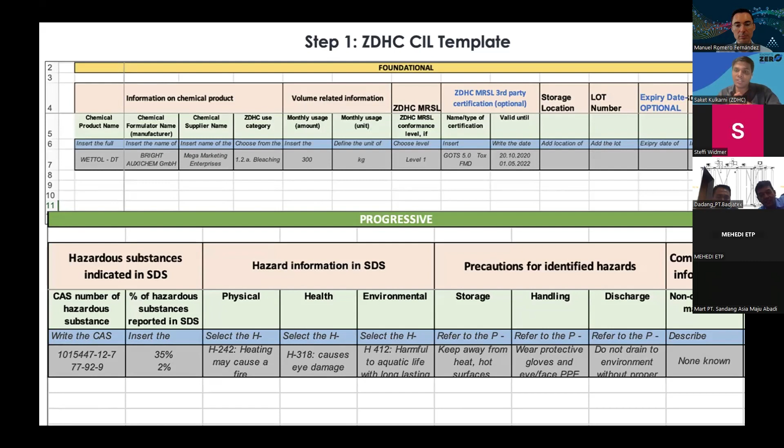This is the simple CIL template which is available on our website as well. You can download it and fill in all the details. Whatever incoming chemicals you are using in your facility, you should mention all the details of such chemicals and check whether those products are registered into the gateway or not.

The second thing is about the gateway platform. I hope all of you are registered into the gateway platform, but if not, you can register. In this, there are two modules: one is the chemical module, another is the wastewater module. The chemical module is basically the world's largest database of safer chemicals.

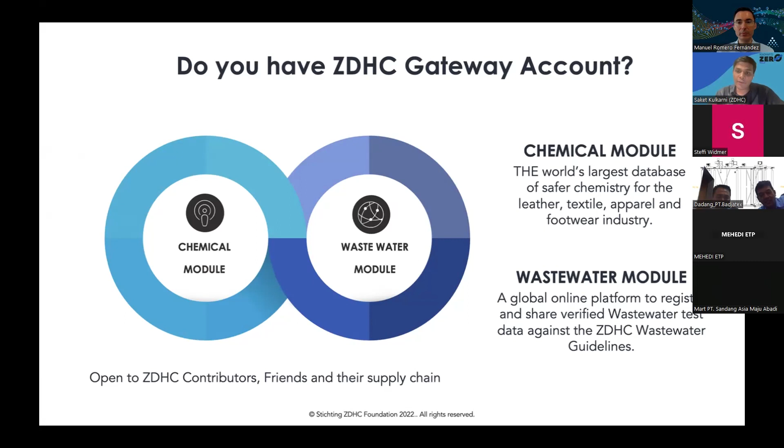As of now, there are more than 110,000 chemical products which are ZDHC MRSL compliant registered into the gateway. The wastewater module is an online platform to register and share your verified wastewater test data against ZDHC wastewater guidelines.

In my earlier slide, I mentioned a terminology called ChemCheck. ChemCheck means a product passport. For whatever chemical products you are purchasing, you can ask for the ChemCheck report, which ensures that this product is ZDHC MRSL compliant and does not contain any harmful chemical, and that it is published onto the gateway platform.

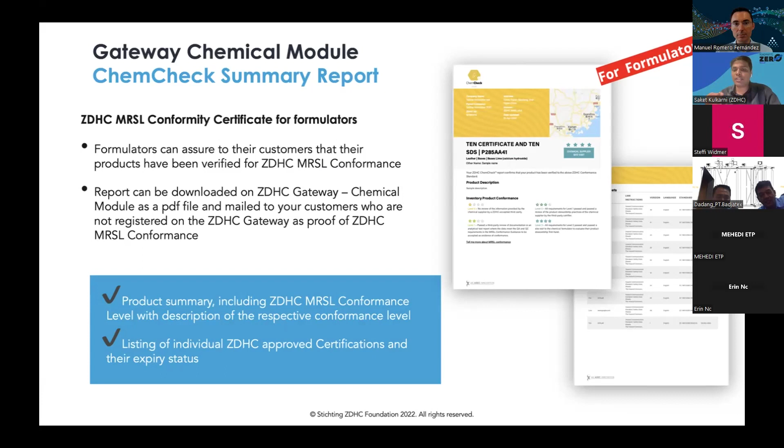So whichever products are published onto the gateway platform, for all those products the chemical manufacturer can generate a ChemCheck report and share it with you.

The most important part is input chemical management. In input chemical management, we have a guideline called ZDHC MRSL. MRSL stands for Manufacturing Restricted Substances List, which is a list of substances banned from intentional use in commercial chemical formulations. That means whichever chemical you are purchasing and using in your factory, in all those commercial chemical formulations, the MRSL listed substances should not be present.

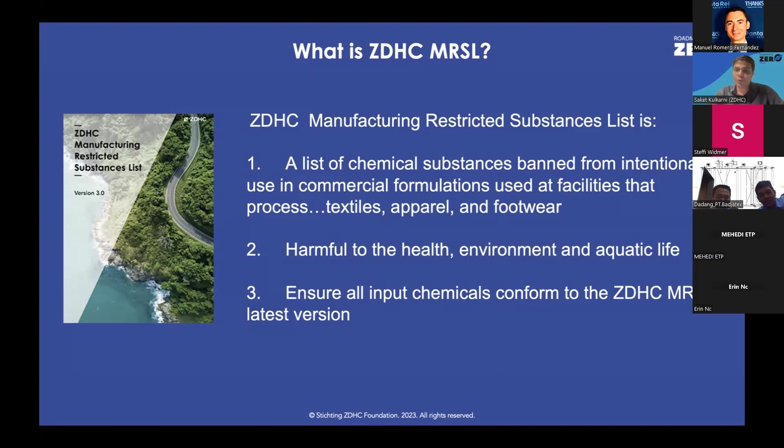Why are these substances regulated? Because they are harmful for health, environment, and aquatic life. As a supplier, as a textile or leather manufacturer, it is your responsibility to purchase at least ZDHC MRSL conformant chemicals. These chemicals are divided into three levels: level 1, level 2, and level 3. At least as a supplier, you should purchase level 1 compliant chemical products.

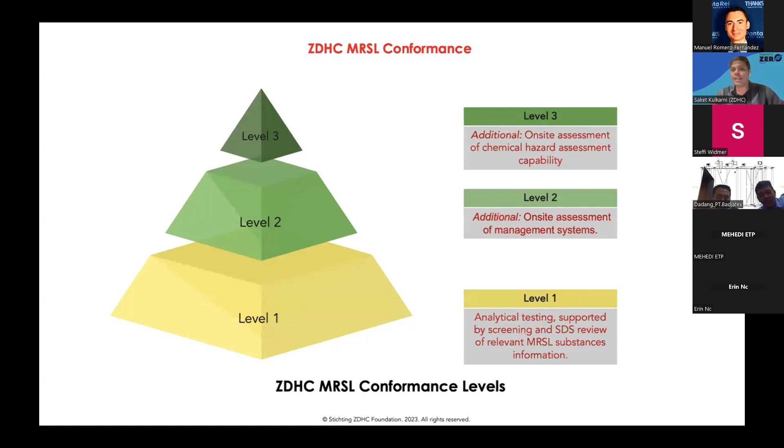When you prepare your chemical inventory using the gateway platform, you can also find out whether that product is published into the gateway or not. You can simply search the product name.

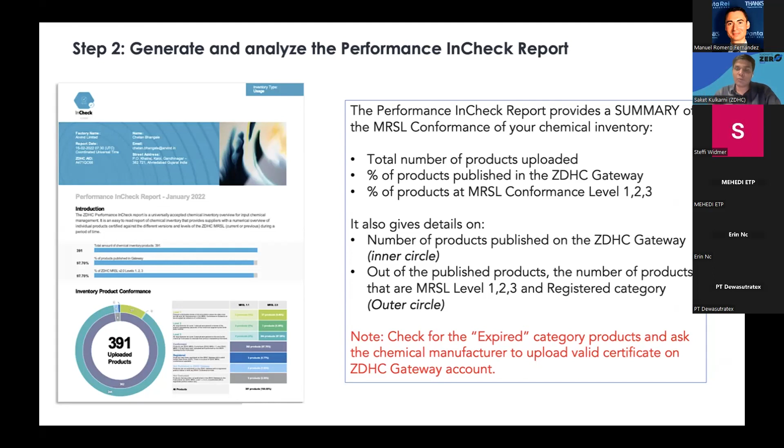For those non-conformant products, you can connect with the chemical manufacturers and request them to publish the products into the gateway platform. This is how you can improve your MRSL conformance status as well.

The third stage is about the verified in-check level 1. Now, with the performance in-check report, the inventory is uploaded by yourself, so there is an issue of credibility and transparency on the inventory. To create credibility and transparency, we have come up with new guidelines called verified in-check level 1. It's basically a spot check guideline where the supplier undergoes a verification, and if they achieve more than 80% score, they get a check mark.

Then the fourth and most important step is to establish a connection request with your ZDHC signatory brand. When you establish a connection request with your brand, that means you are giving them access to the data. So whatever you are doing on the gateway platform, whatever you are implementing for the ZDHC Roadmap to Zero program, you are sharing this data with your connected brand.

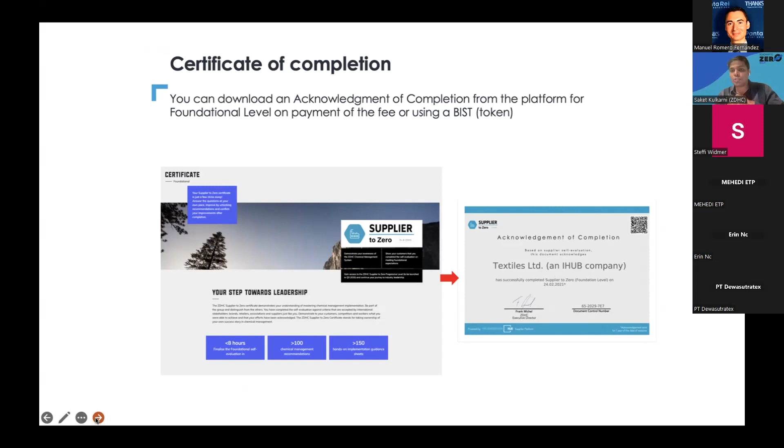This is how it looks like. The validity of the certificate is for a period of 1 year, and this certificate will also reflect into the ZDHC gateway account. The third part is about output chemical management, where you need to perform testing with respect to ZDHC wastewater guidelines and generate the ClearStream report.

Please understand that the wastewater testing is not a pass or fail report, but it is a tool to support you for improving your input chemical management as well as the process chemical management part as well.

Then lastly, we have a platform called ZDHC Academy, through which the suppliers can register themselves and take the trainings as well. All the courses are registered here under the courses list. ZDHC accredited training providers can take all these courses, and for getting a certificate, you must achieve more than 80% scoring.

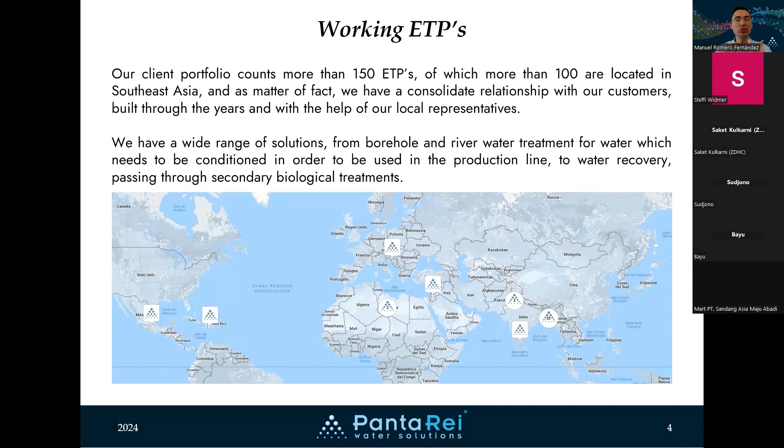Just a little bit about us, in case you don't know us. We are an Italian company with international presence, and we've been in this market for 17 years. We are trying to help our customers achieve their environmental compliance related to water and wastewater. We have 17 years of experience as PantaRei, but some of us, such as PantaRei's founder, Mr. Felice Raca, has more than 25 years of experience in this water and wastewater treatment field. We have more than 150 effluent treatment plants, and more than 100 are located in Southeast Asia. We have a consolidated relationship with our customers, and this wouldn't be possible without our local representatives, like Primatec in this case in Indonesia. We can offer anything from borehole or well water treatment to water recovery, and of course secondary biological treatments. We think one of the most important things about us is that we focused on the textile industry, because we know it's a very specific kind of effluent that you can have in the textile industry, and this is why we strive to give the most sustainable solutions for this market.

We're an ISO certified company, but most importantly, and we're proud to be an accredited training provider of ZDHC. As Saket said, this is not a certification. This is a program that has united partners and contributors with the common goal of guaranteed water discharge with increasingly stringent parameters as a part of the compromise with environmental sustainability.

We want to contribute as much as we can with this shared objective, because as we like to think about it, ZDHC is not a certification, is not a law requirement, it's a philosophy of having a holistic approach from cradle to grave, a closed loop. Because if you have good inputs, you will have good outputs. This is what we're trying to do here, to put all the stakeholders together for a greater good.

And then we'll come to the ZDHC wastewater guidelines. Many of you may already know this document. This is in order to have a single approach towards discharge limits in the textile industry. Because now we know that in different countries there may be different regulations, this document, with the technical team and also with the buyer stakeholders, is trying to create an even baseline for everyone, so it is clear for everyone, and so that this guideline is your go-to reference point when it comes to wastewater, so that everyone can have the same documents, the same approach.

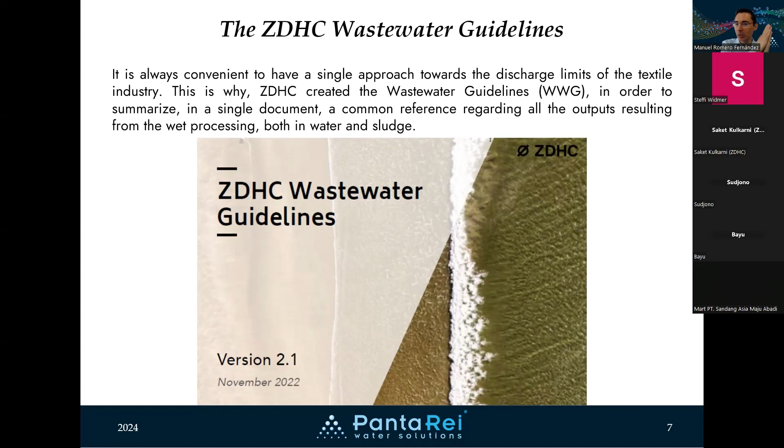And through these wastewater guidelines, we look at the output part. But as I said, the MRSL is a very important guideline as well, because basically you get what you put into the system.

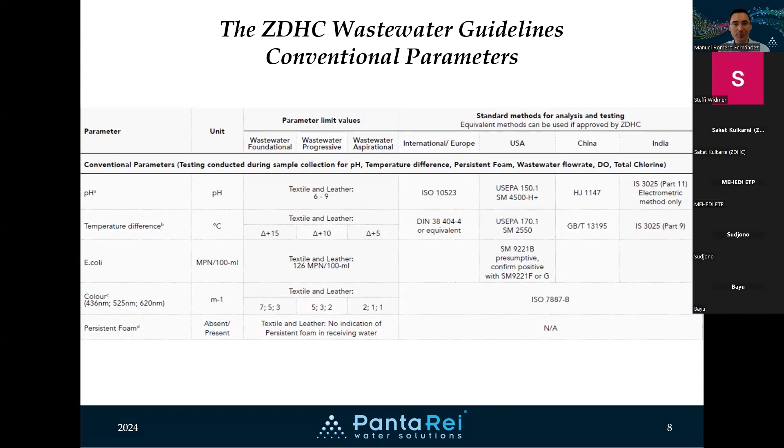That's very clear water. That's measured in meters -1. And then you have the foam. You have here some other parameters that are also part of the conventional side.

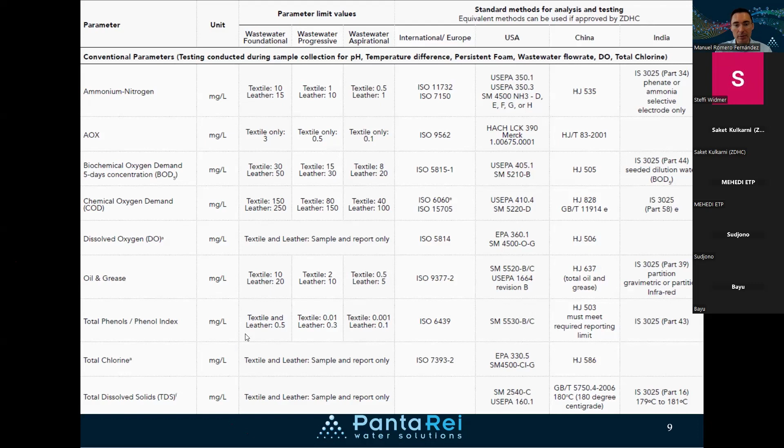How do you meet the wastewater guideline parameters? I think some of the most important things come from simple approaches. First, know your wastewater. It's important to carry out composite samples, and it's highly recommended that not only conventional parameters are tested, but also heavy metals, in order to know that you are compliant with the complete wastewater guidelines.

What we saw before covers conventional parameters, but of course you also have metals and so many other components. And you have the MRSL as input, because here we're talking about output, but as we said before, what you give is what you get, basically, also in wastewater treatment. So first of all, you need to know what kind of wastewater you have.

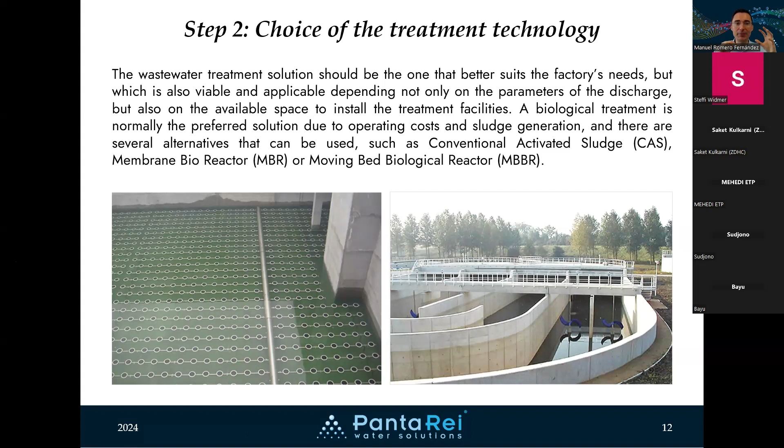Depending on that, you can choose the treatment technology that will better suit your needs. There's a very wide range of technologies you can apply, depending on the water quality you have and how much space you have to install that treatment. For example, conventional biological treatment is often a preferred solution because it has lower operating costs and low sludge generation. You can also have a membrane bioreactor, a moving bed biological reactor, or in some cases even an anaerobic reactor, depending on the type of wastewater. All of these are biological treatments, but each has specific requirements and characteristics.

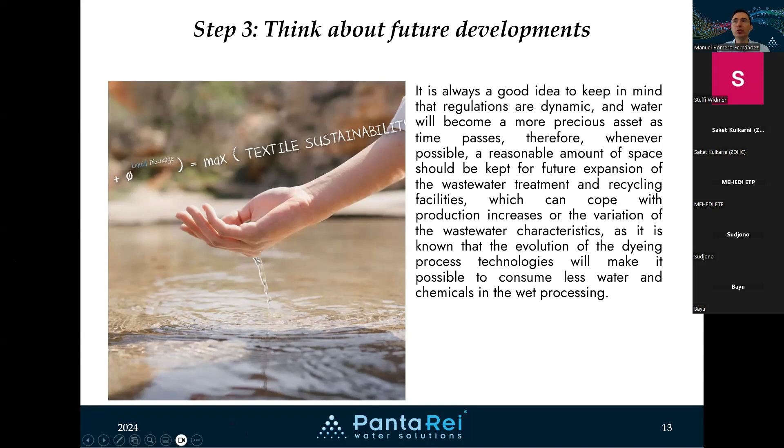After you've chosen the technology, depending on the space and the wastewater you have, it's always a good idea to remember that regulations can be dynamic, because wastewater guidelines are dynamic too. The type of textile production we have today is not the same as 20 years ago, so the regulations should be adapted to current types of production facilities. It's a good idea to keep in mind that things may change in future, and to have available space for future developments - maybe because you want to recycle some water later, so you will need space to do so.

About wastewater treatment technologies: the basic unit, the first step towards sustainable development and environmental compliance, is implementing good technology for wastewater treatment. For example, we mentioned the biological process. Why biological and not only chemical-physical processes? Normally we try to keep it as natural as possible, to generate the lowest possible amount of chemical sludge. With chemical treatment, chemical precipitation, sometimes we get very good performance in terms of solids and color removal, but of course you have an input, which are the chemicals.

So we're trying to clean the water with the lowest possible sludge generation. This is why we always try to make a balance: what's the cost of implementation, what's the cost of operation, and what are the benefits you get. With the biological oxidation process, ultimately we're trying to break the pollutant molecules down to carbon dioxide and water - the simplest molecules from the complex carbon sources in the discharge. After we've stabilized and removed this organic matter, then we can think about tertiary treatments for water recovery.

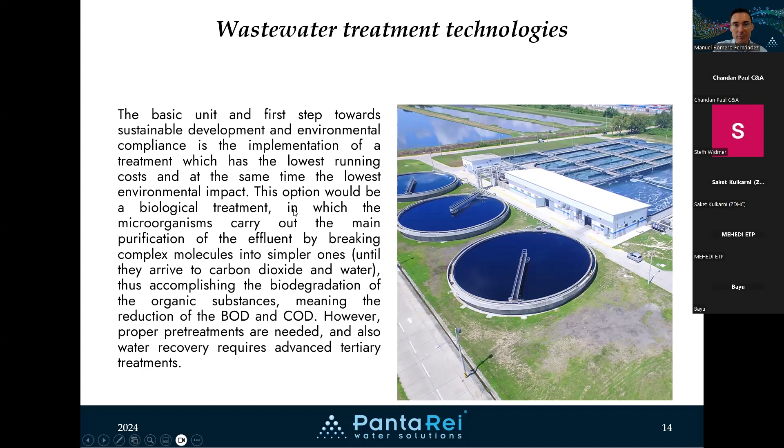Here are some examples of pretreatments, because any wastewater treatment system will have pretreatments, primary treatments, secondary treatments, and tertiary treatments. As pretreatment or primary treatment, we have screening to remove the largest particles, preventing them from going forward to other processes or pumps, or from settling in tanks and reducing available volume. Then we have fiber removal, because sometimes, for example with cotton dyeing or production of sweaters or hoodies, you have a lot of fibers. If you let those fibers pass through subsequent treatment phases, you get higher organic load, higher suspended solids, and more sludge generation. So we try to remove these fibers and turn them into a resource instead of waste. How do we do that?

Basically, we have customers that have biomass boilers, and biomass, they heat up and burn these fibers to generate more energy. So from waste, we go to resource when it comes to fibers removal.

Then we have the neutralization, because normally, as you may know, in textile factories, especially when we do cotton dyeing, we have the consumption of soda. So the pH will be high, will be alkaline. We need to neutralize that, to lower it in order to keep it closer to neutrality, to a neutral pH. That doesn't necessarily mean we need pH 7 - it can be a little bit alkaline because you need a little bit of alkalinity in the biological process, but it needs to be somewhat neutral.

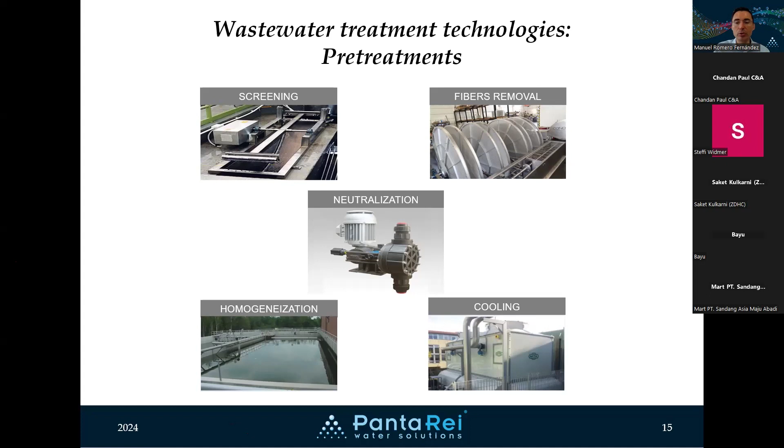As secondary treatments, we have the normal biological treatments with activated sludge, the conventional activated sludge. We can have the membrane bioreactor - we'll talk more about that in a minute. And then we can have the moving bed biofilm reactor, which is a biological treatment too, but here the biomass is attached to plastic supports in order to develop more biomass growth around the supports, which have a huge active area inside because of the pores.

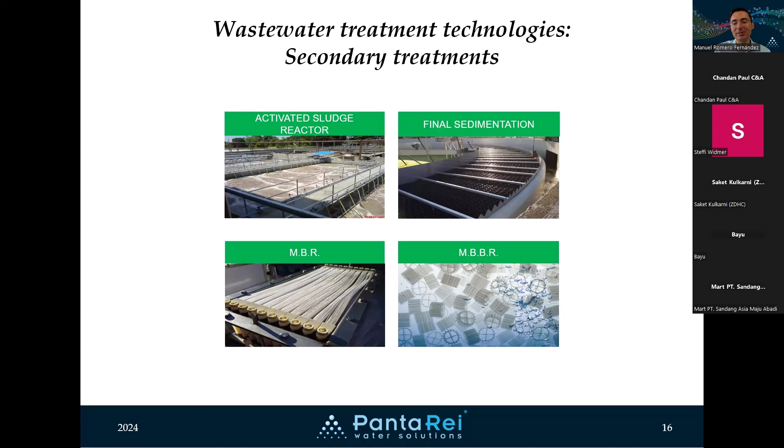After we have treated the wastewater, we have to think also about the sludge, because that's another important part of the process. The sludge is also regulated, not only by local regulations, but also by the ZDHC guidelines. First of all, we normally need to do a thickening of the sludge, and then we can think about the sludge dewatering. It can be a filter press, a screw press, a belt press, or sludge drying beds, depending on the amount of sludge generation you have on a daily basis.

Another important part after we have treated the water with secondary treatments is the possibility to recycle that water. Once we go out of a biological treatment, we need to refine, to purify the water to a higher level so it can be reused at some point in the factory. Normally, it can be filtered, then we can go to an ultrafiltration section to further remove the suspended solids and also the colloids, and also the apparent color - because the true color will stay in solution, but the apparent color will be removed as you remove the turbidity. That's the application for ultrafiltration.

And finally, if we want water that is completely free of color, has a very low salt content, low hardness, and can be reused even in the dyeing process, then we need to talk about reverse osmosis, which is the final treatment for the water. Water coming out of reverse osmosis will definitely comply with the aspirational guidelines of ZDHC.

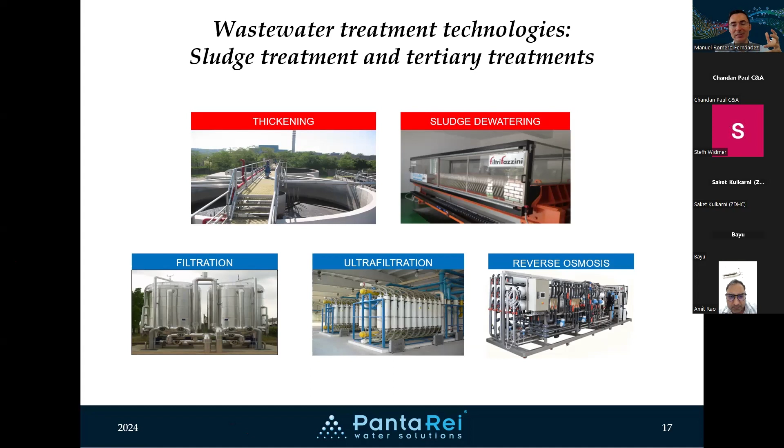A little bit more about the MBR application, which is the membrane bioreactor. This is still a biological treatment with suspended biomass, like the conventional one, but we have one limitation: at some point, if you keep increasing the mixed liquor suspended solids, you will have a very high solids load in the secondary clarifier, and you will ultimately have a sludge washout.

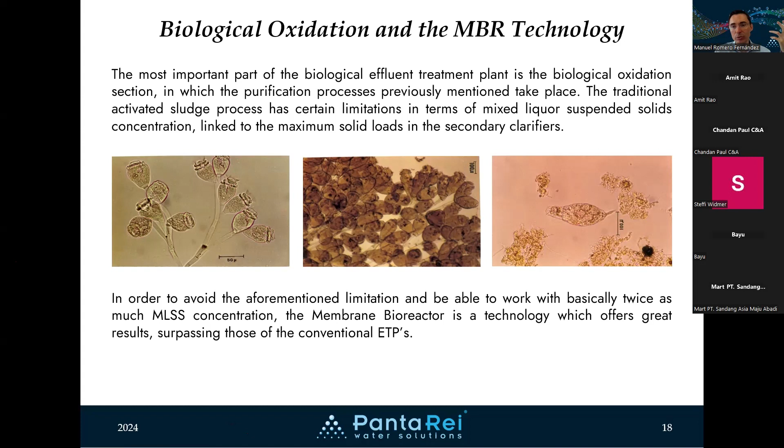So what happens if we don't have a secondary clarifier? If we have a physical barrier that can withhold the sludge but let water pass, that would be the membrane bioreactor. With the MBR, you can increase the MLSS concentration without the sludge washout risk, because there is a physical barrier.

When we increase the MLSS concentration, the space that you need for the water treatment plant is lower. You need less space. Why? Because, as we always say, let's think about the ETP, the wastewater treatment plant, as a factory where you clean the water. The MLSS will be the workers.

If you have a factory with 100 workers, there is so much fabric that you will be able to process. But if in the same factory you have 200 workers, you will be able to double the production capacity. The same applies to the machines: if you have twice as many machines, then you will be able to produce more.

The same with the MBR, because you will have more workers, which are the biomass inside the biological reactor. This is why you can see it two ways: within the same volume, since we have more microorganisms, you can treat more wastewater, or you can treat the same wastewater within the same space with a shorter residence time.

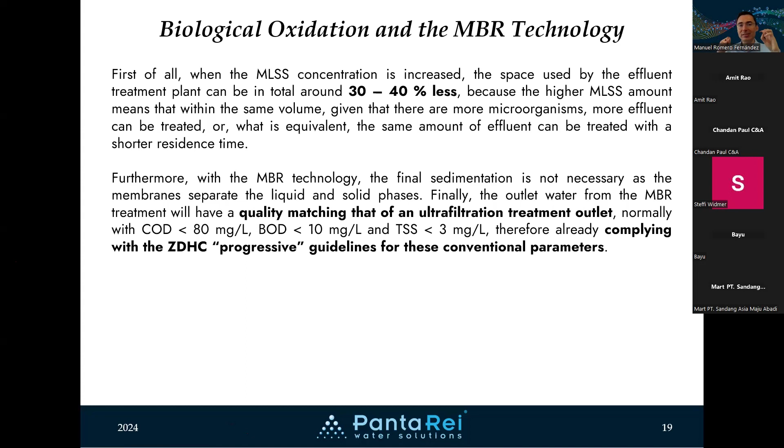Also, the MBR membranes are basically an ultrafiltration section. That means that after them, you normally have COD less than 80, BOD less than 10, TSS less than 3. For these specific conventional parameters, you will be in the progressive area of the ZDHC wastewater guidelines.

Here you can see some examples of MBR cassettes. We try to provide compact cassettes so that you can plug them inside the tanks. Here you can see that the water can pass and flow through the membrane sheets so that it can be collected as permeate and extracted from the system without clogging the membrane modules.

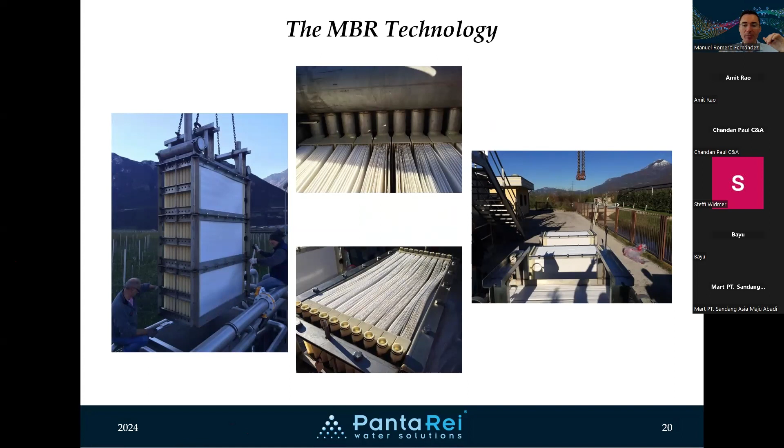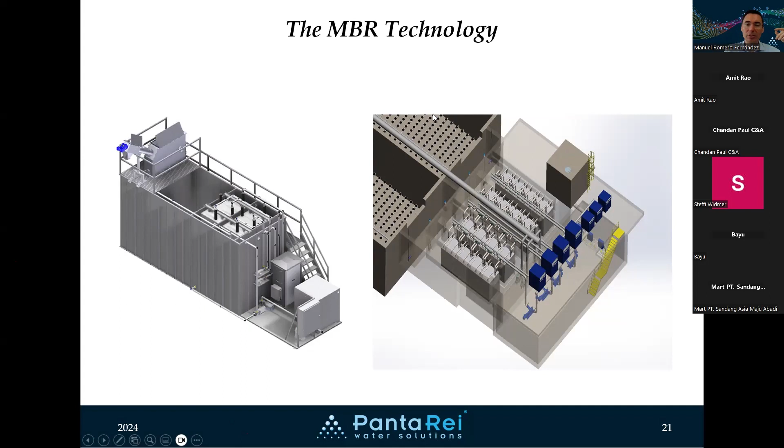The water is collected by the permeate pumps, is extracted in these collection pipes, and then the rest is recycled back into the biological system. We have some more pictures here.

Sometimes you can even make them with a very low visual impact. Like here, in some cases, some customers would plant trees and put in a garden, and then you have the MBR tanks which are submerged. So from the visual point of view, this will look also very good because you will have them integrated into a more environmentally friendly general context.

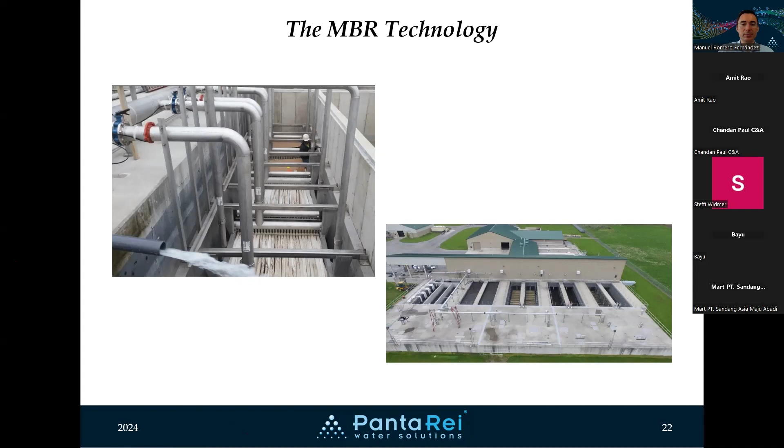More examples, you can put them underground as well.

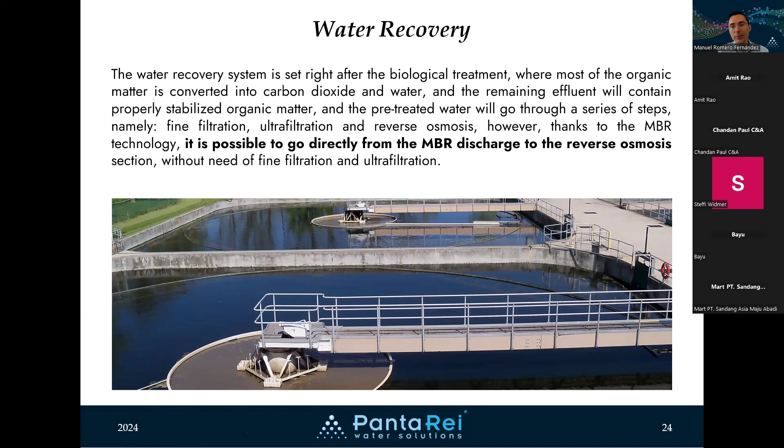After we have treated the wastewater, we can talk about water recovery. After we have stabilized the organic matter, we can go through a series of steps like fine filtration, ultrafiltration, reverse osmosis. However, if you already have MBR technology in the biological oxidation tank before the reverse osmosis, you do not need to filter and ultrafilter the water, because the MBR itself is an ultrafiltration section. You can directly feed the MBR output into the reverse osmosis, thus saving additional space in the system.

The reverse osmosis, as we said, is the ultimate filtration treatment because it's the only one able to separate all kinds of dissolved salts. Normally, the permeate will have very low TDS, lower than 150 milligrams per liter, no color, and very little hardness or no hardness. You can reuse this in the production units.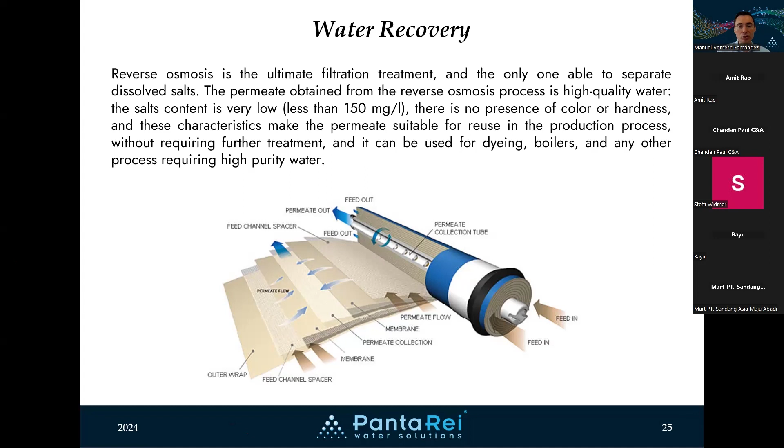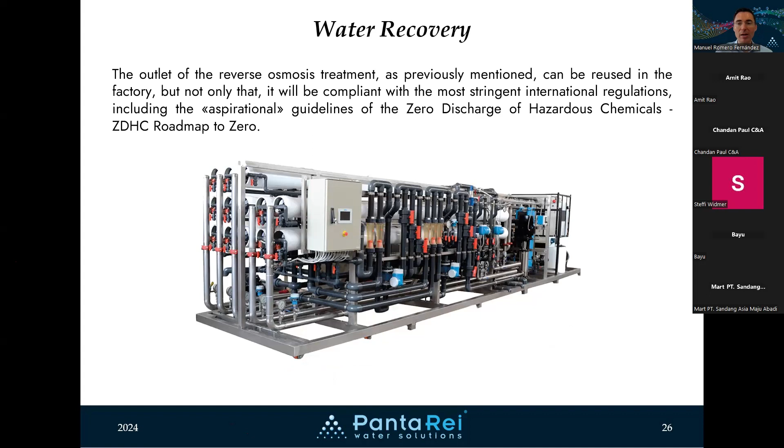Of course, when you have this kind of water after treatment, you will be compliant even with the most stringent guidelines, which are the aspirational guidelines of the ZDHC program. This is just an example of how a pre-assembled reverse osmosis kit would look like.

And these are some real values that we got from some textile facilities. These are the average values you would expect after biological treatment, because they were pretty much compliant with the conventional guidelines. Their average was 30 BOD and 150 COD.

This doesn't mean the parameters were constant, because there was some fluctuation. Sometimes it was going to 140, 120, 153. The average is more or less around this.

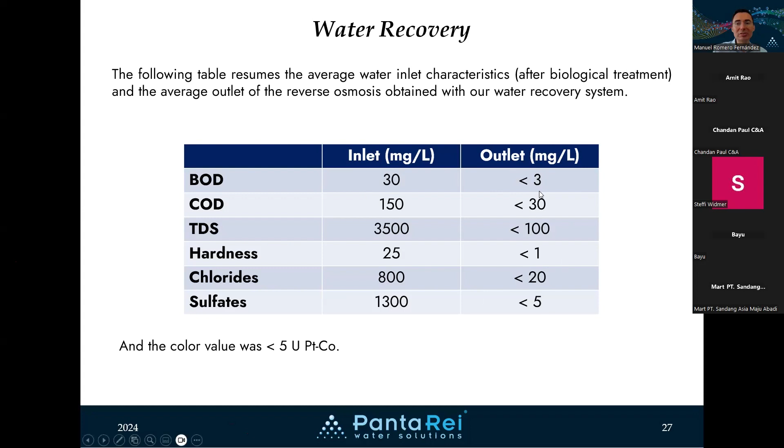And the water obtained after the water recovery section with reverse osmosis was like this: BOD less than 3 (actually the measuring limit, so it might have been 0), COD less than 30, TDS less than 100, hardness less than 1 milligram per liter, chlorides less than 20, and sulfate less than 5. The color value was less than 5 units of platinum cobalt because the water was transparent. So this water could pretty much be reused, and was actually reused in the dyeing factory.

Here we have some pictures of this study. In this case we had biological treatment, ultrafiltration, and reverse osmosis. After biological treatment, the wastewater looked like this because no decolorant agent was used, so of course there is color there.

After the ultrafiltration system, the same water looks much clearer. Why? Because the ultrafiltration removed the colloids and suspended solids, therefore removing the turbidity. So apparently the wastewater color was like this, but after ultrafiltration it looks much cleaner. And after reverse osmosis, the water was completely transparent, with a value of less than 5 units of platinum cobalt.

So this is basically, in a nutshell, what the wastewater treatment options for the textile industry would look like.

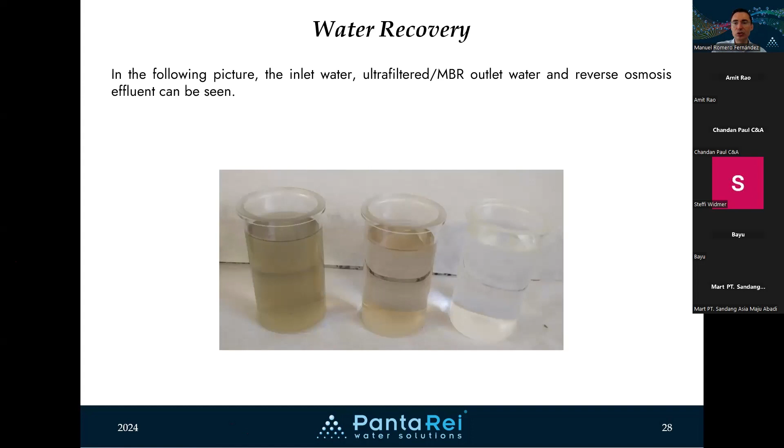Then we have a case study to talk about the root cause analysis, the corrective action plan, and the solutions that were found. This is one example of an aeration basin and biological oxidation tanks, in which processes were developed to enhance performance and energy consumption.

The initial conditions were that this factory had an incoming flow of 9,000 cubic meters per day, a theoretical oxygen requirement of 737 kilograms per hour. They were doing aeration with surface aerators, 28 machines, each with a theoretical capacity of 27.5 kilograms of oxygen per hour. The unit power was 22 kilowatts, and the total installed power was 616 kilowatts.

So a very significant amount of installed power. But the absorbed power was also very high, 493 kilowatts, and the daily energy consumption was 11,832 kilowatt hours. This means they had 1.31 kilowatt hours per cubic meter as specific energy consumption, which is a very large value considering this was only for the aeration section.

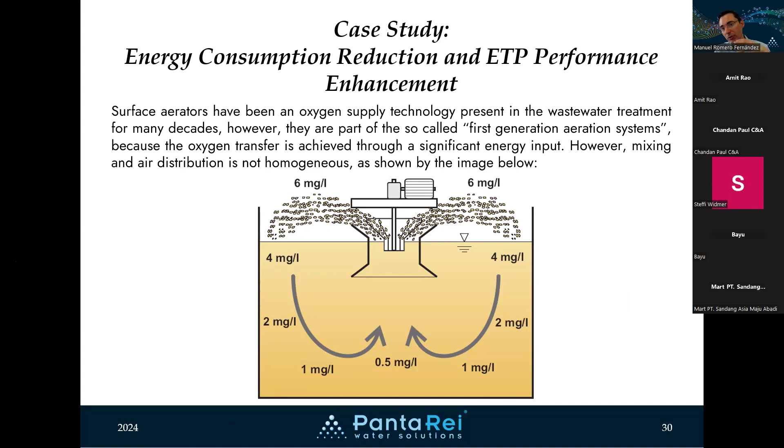So we identified what for us was the source of this energy inefficiency, and said we need to focus on having a more efficient and more homogeneous air distribution in the system.

In this case, we considered fine bubble diffusers, because each fine bubble diffuser had 7,000 microholes, so 7,000 micro bubbles were being generated in each single diffuser. Since you have more exchange area for the transfer between air and water, you get higher transference, because mass transference is regulated by the concentration gradient, but also multiplied by the surface area. So more area means more mass transfer and more oxygen transfer efficiency.

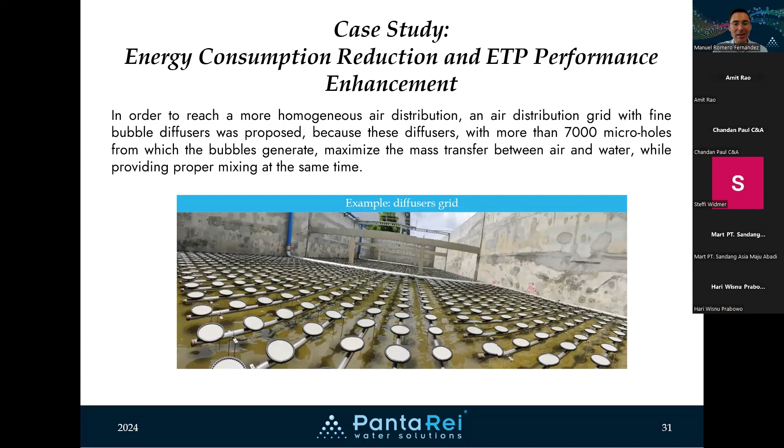What happened after this was implemented? Well, there was a significant change. The theoretical oxygen requirement was the same, but instead of surface aerators, we put in an oxidation grid like the ones you can see here, with diffusers fed through blowers.

Instead of those 28 surface aerators, we considered 4 blowers and a diffuser grid, supplying 8,000 cubic meters per hour of air. Each blower supplied 2,000 cubic meters per hour with an installed power of 75 kilowatts, and in total we were absorbing 193 kilowatts. So the energy consumption dropped from 11,800 to 4,632 kilowatt hours, meaning a reduction in specific energy consumption.

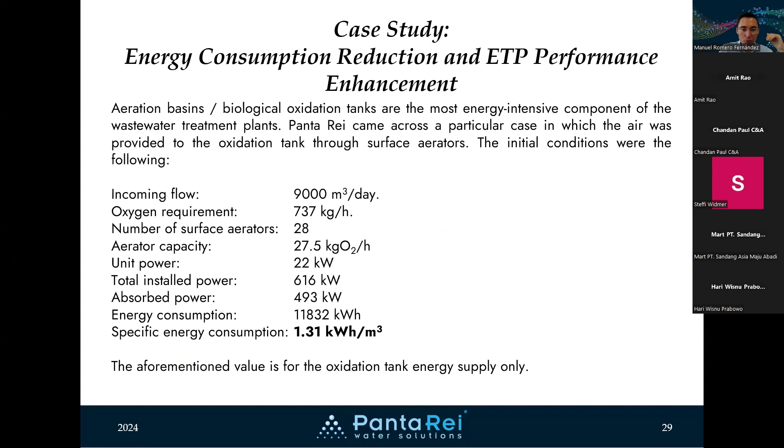We're talking only about the biological process here. Of course you have power consumption from pumps and other appliances, but the largest amount of power comes from the biological aeration. So we decreased from 1.31 to 0.51 kilowatt hour per cubic meter. That means a 61% energy consumption reduction just by changing the aeration technology.

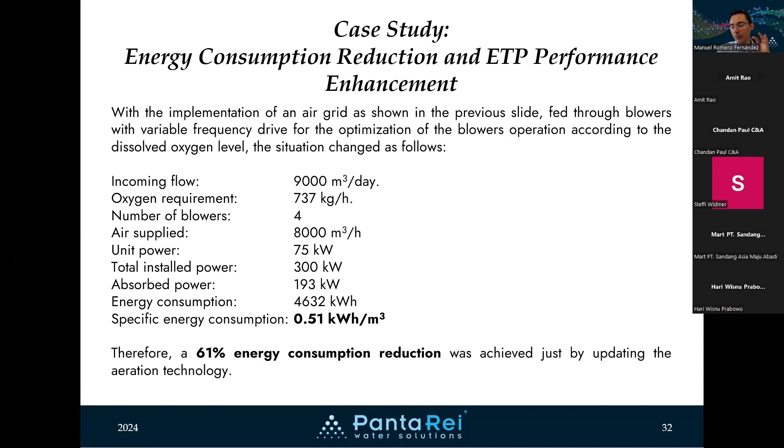You can say, of course, an investment was made because the technology was changed. So for sure there was an investment. But as you can see, the advantages from that investment were huge, really significant. So in this case, the corrective action plan was the modification of the aeration technology within the effluent treatment plant in order to achieve higher efficiency.

Sometimes when you implement this kind of upgrade, you also get some side effects that can be positive. For example, they had been struggling a little bit with some parameters, especially suspended solids. Some anoxic zones got created when there was a bit of sludge washout, and COD and BOD values increased as a consequence.

When the aeration became more homogeneous, not only did we decrease the amount of energy being used, but we also improved the performance of the effluent treatment plant with this modification, because everything is related. So you focus on one of the main variables and act on that as part of the root cause analysis, but it's also very important whenever you do something like this to change one variable at a time, to see the impact of that variable on the whole system. This is what we did, and these were the advantages that were obtained.

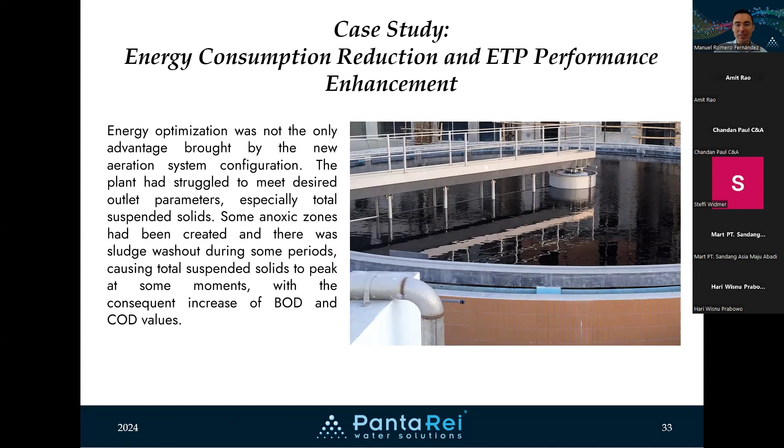As one of the last points we'd like to share, there isn't just one right approach to wastewater management. There can be many right answers. What's important is proactive collaboration among all the stakeholders—between the factories, the buyers, the chemical formulators, the solution providers of wastewater treatment, and everyone involved in the supply chain, because we are all interconnected. We want to reach an integrated and global solution as a team. That is what ZDHC is about.

This is why we say that for us, ZDHC, most of all, is a philosophy, because we want to create synergy for sustainability.